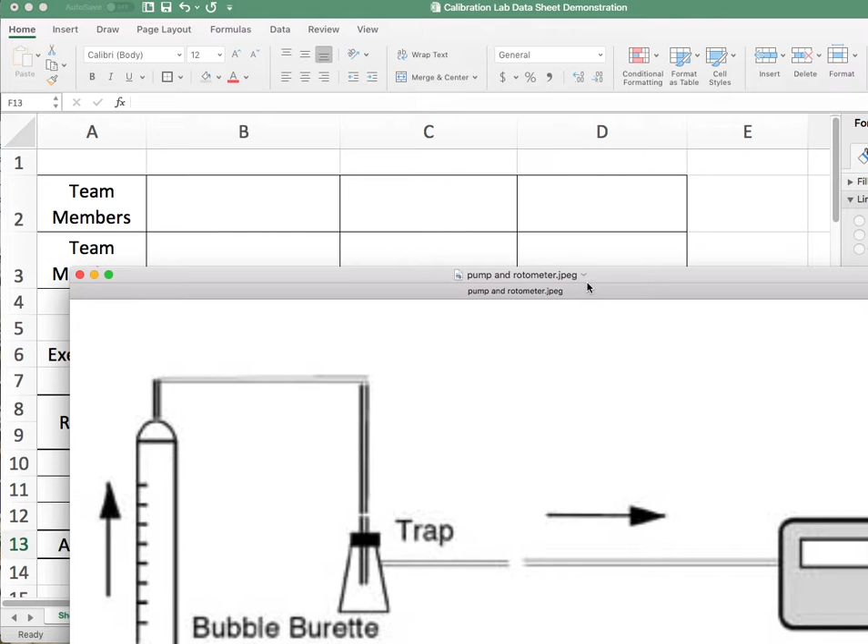In the first exercise that we're working on, we were going to measure the rate of flow of air going through a pump. Now, these pumps, very frequently, we take a look at these pumps. Sometimes they'll have a little rotometer built into them, a little gauge that'll tell you how fast they're moving air or pulling air. Not all of them have that. And when they do have it, they're not terribly reliable either.

At best, you can use that to set the pump volume for, say, 1 liter per minute, 2 liter per minute. But it's not reliable enough for you to depend on in terms of determining how much air you've sampled after it's run for an hour or 2 or 3 or 8 hours and so on. So we want a more accurate way to judge how fast air is moving through this pump.

So our first technique is going to be use a very accurate version of a calibration device called a bubble burette. And in fact, it's just an inverted burette like you would see in any chemistry class. It's very large. It's 1 liter of air, 1,000 milliliters or cc's, and 1 liter of air can be pulled through here. Okay, and we're going to connect that to a trap, which is just simply a flask, like an Erlenmeyer flask, so that the bubbles can get captured and not drawn into the pump.

And then from there, we're going to pull air from that trap into our pump. And in fact, we didn't have a trap available. So literally, we're just pulling air through this burette and through the pump. Now we can bring a little cup up to the bottom of this burette as this pump is pumping, and we can form a bubble that rises through the burette at a given rate. And that rate's determined by how fast this pump is pulling air.

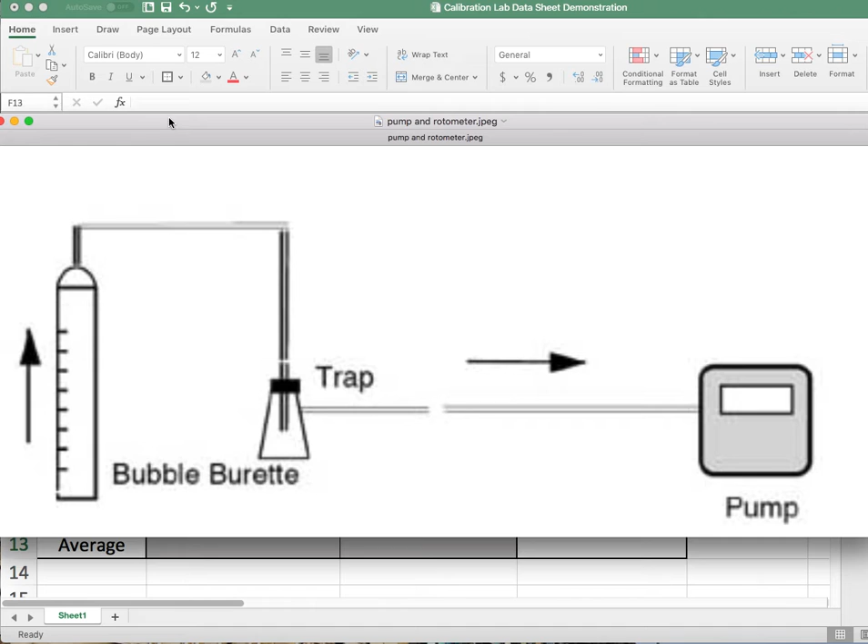Okay, and then we're going to go over to our Excel spreadsheet. Now I've put in numbers here simulating this. The pump is on. We set the pump wherever we're going to set it. And the reason why you see 3 readings here is because we're introducing certain inaccuracies, such as how good we are with a stopwatch. We're not going to want to take just 1 reading. We're going to want to take at least 3 readings and average them to determine what the real flow rate is through this device. So I've put in here that we got it set on low.

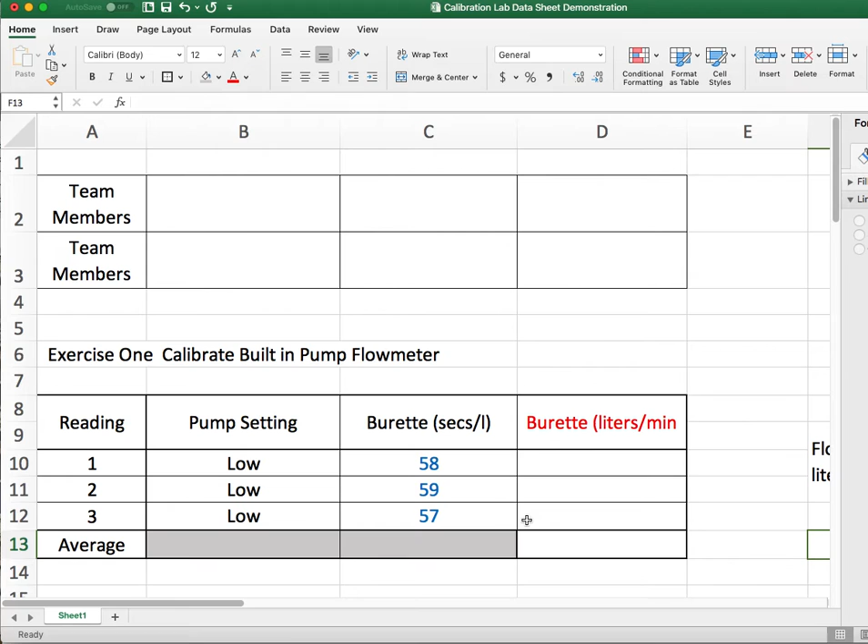Pump is running continuously through this whole process. I start the first bubble up. First bubble goes up. It takes 58 seconds for that bubble to go the length of 1 liter in that burette. So I do it again. Second bubble takes 59 seconds. Third bubble takes 57 seconds, right? This variability probably has more to do with my timing than it does with the actual pump itself.

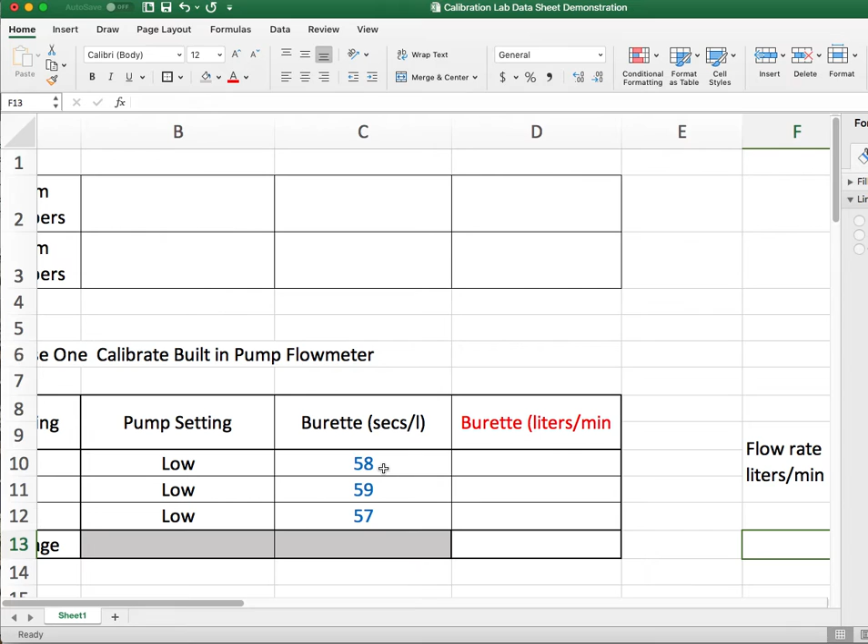So now we have to determine, well, what flow rate does that represent? I know if it takes 60 seconds for a liter of air to go through the burette, 60 seconds is a minute, and it's 1 liter, so it's 1 liter per minute. So since it went a little bit faster, I know right away that it's flowing at a little bit faster than 1 liter per minute.

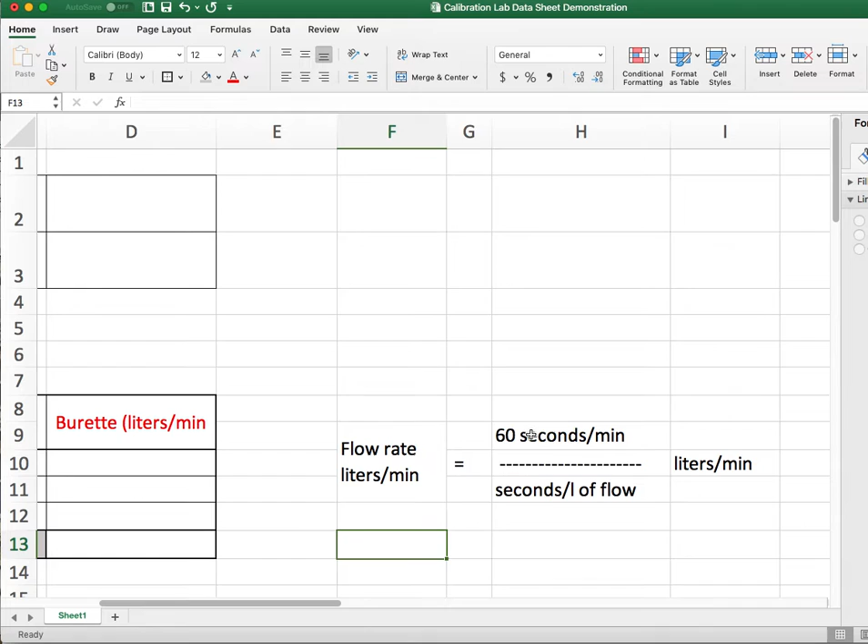Very simple formula for figuring out the actual flow rate. It's 60 seconds per minute divided by the number of seconds it takes to get 1 liter of flow through here. So in other words, in this case, it would be 60 divided by 58. So I'm going to do this calculation right here in Excel. I can actually do it by setting up a formula. Equals 60 seconds divided by the amount of time it took to pull 1 liter of air through the burette. So the flow rate was 1.03 liters per minute.

Okay, and I'm going to copy that formula down. And for 59 seconds, it comes out to 1.01. For 57 seconds, it comes out to 1.05. It will be very valuable for you guys to learn to improve your skills in Excel, because it's a great tool for doing calculations like this.

You can see that if you look up here, 60 divided by C11, 60 divided by C12. By grabbing that corner and pulling it down, or highlighting and going up to the top and saying fill down, I was able to get it to copy that formula down to each of the other two cells, so I didn't have to recalculate it.

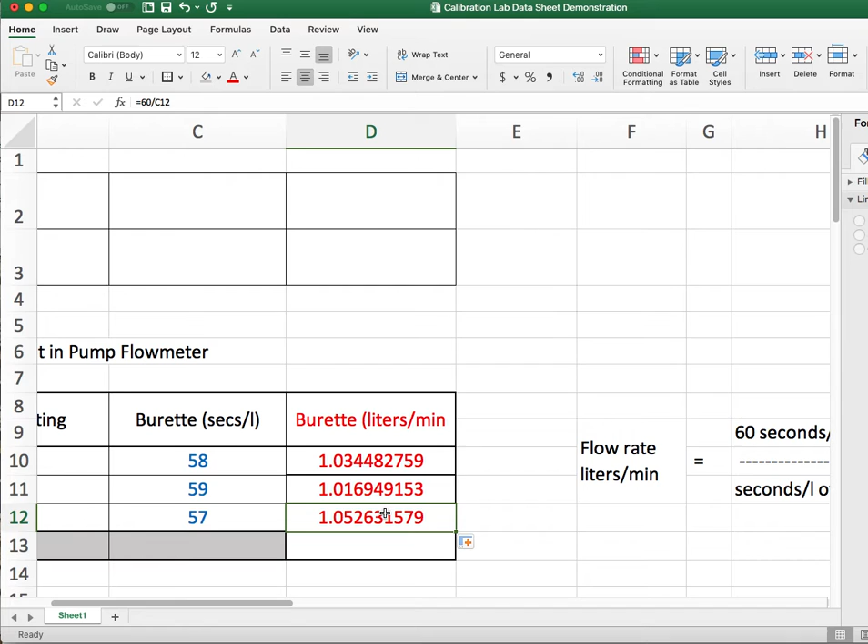Well, now I want the average of these. I'm going to type in here equal sign to let it know I'm about to put in a function, average. Excel has a function for average, parentheses, and I'm going to tell it to find the average of the three numbers between cell D10 and D12, my three values. Okay, and in fact, it turns out that the average flow rate is 1.03468, so on and so forth.

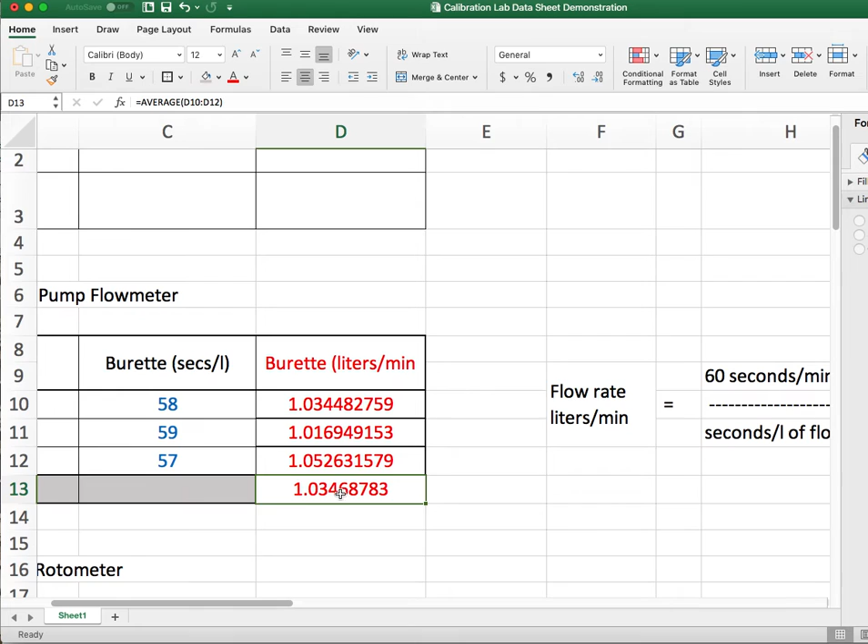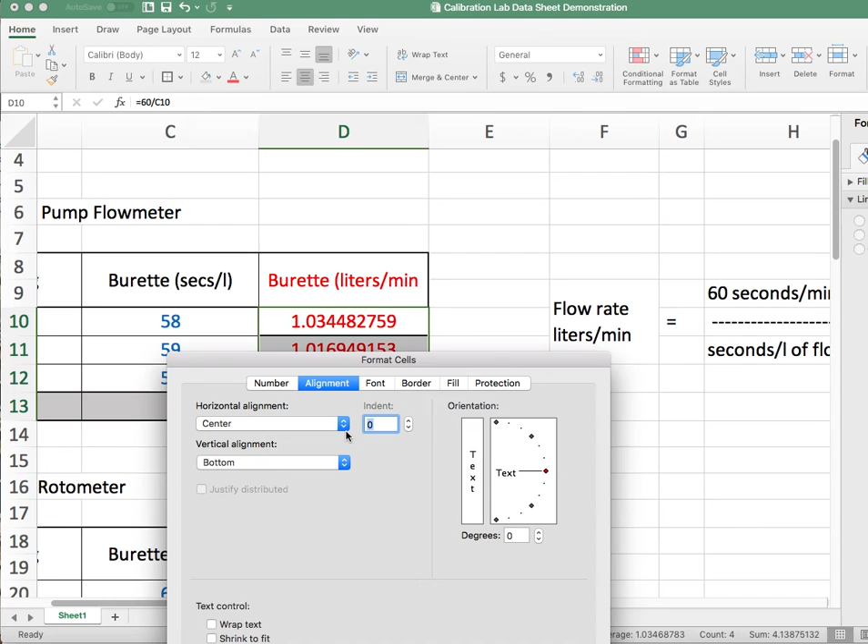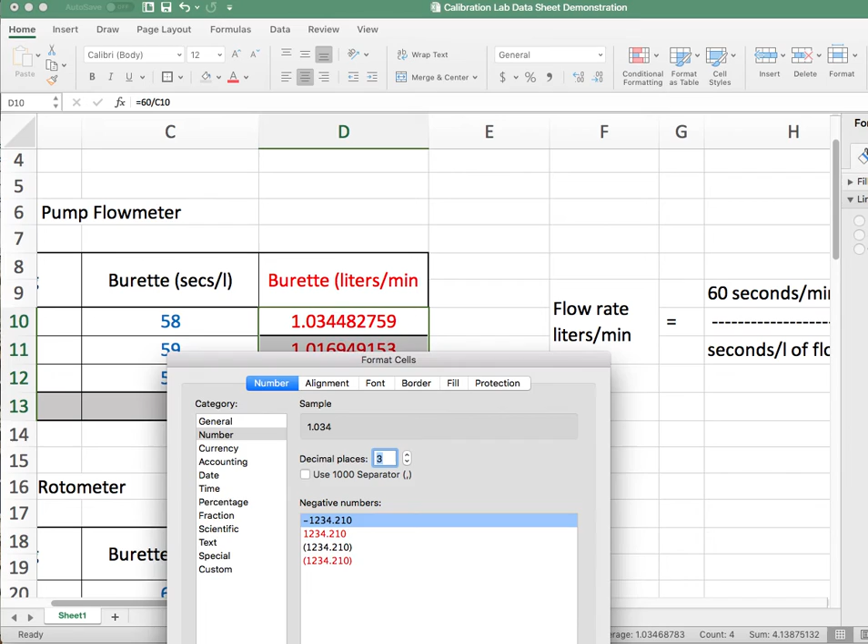If you're uncomfortable with viewing them this way, you can always just highlight them, say format cells, and, for argument's sake, I'm going to go into numbers. Let's say I only want to see this number to 3 decimal places. That would be down to the cc, like so. Okay, now keep in mind that the actual value is still in here.

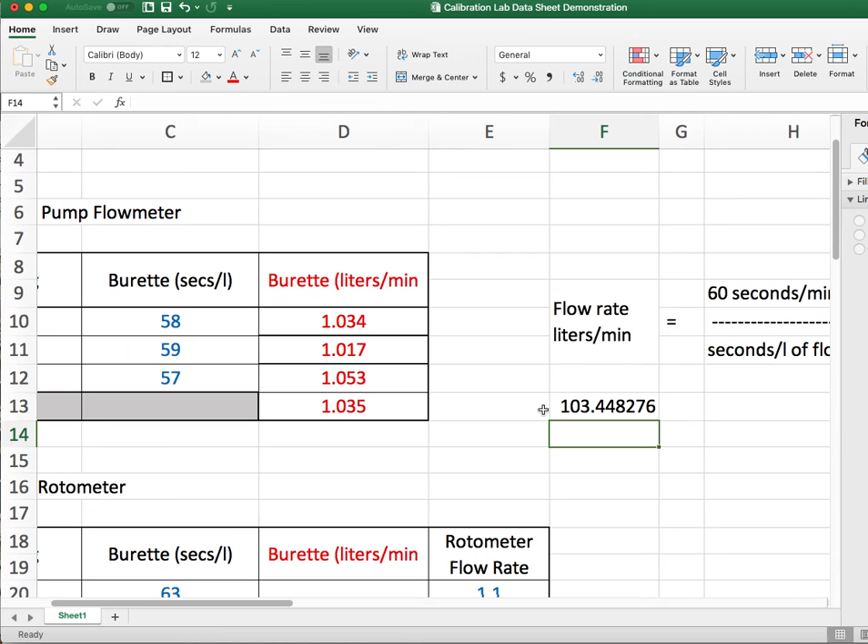It's just rounded off. Excel just rounds it off in appearance, so it's still there for you to do your calculation. So for instance, if I say equals this number times 100, notice I get much better resolution than if I would have rounded this number just by clipping off the numbers at the end there. Okay, so that's how we're going to do that.

Now we know that this pump, as set up here, has 1.035 liters per minute, or 1,035 cc's per minute flowing through the pump. That's our first exercise, to use a bubble burette to find the rate at which air is flowing through our pump, so that we can use it effectively.

Okay, next video, we're going to talk about using a rotometer. And in order to use a rotometer, we need to calibrate it first so that we know it's accurate.